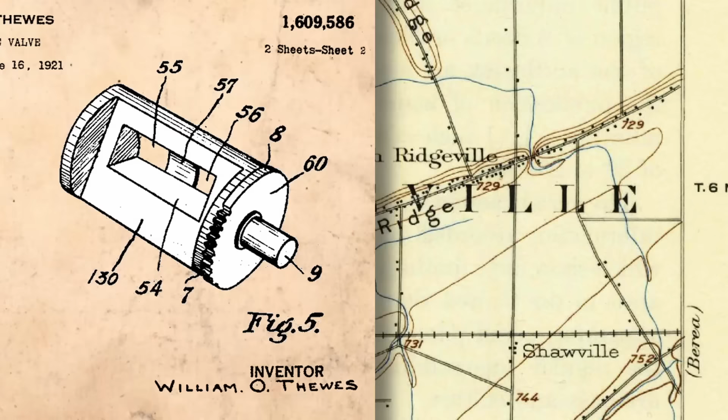The story starts in the town of North Ridgeville, Ohio, with a man named William Thewes. William was born in 1883 in Cleveland and had previously invented a carburetor for the R&S Valve Company in 1921. In 1922, he set out to create an improved pipe wrench design.

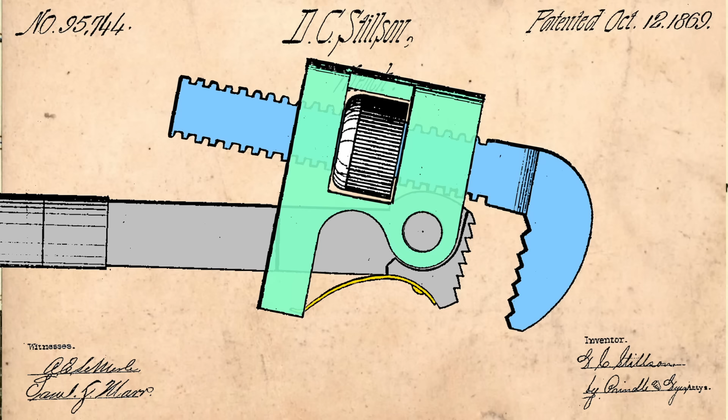At this point in time, the Stillson pattern pipe wrench had become the standard pipe wrench used in America, but Thewes thought he could improve it by reducing the parts count to create an even stronger wrench. Thewes' design did away with the pivoting head mechanism, which had to be machined out of a separate forged piece. He also substituted a cast lower handle, which used a forged replaceable jaw insert.

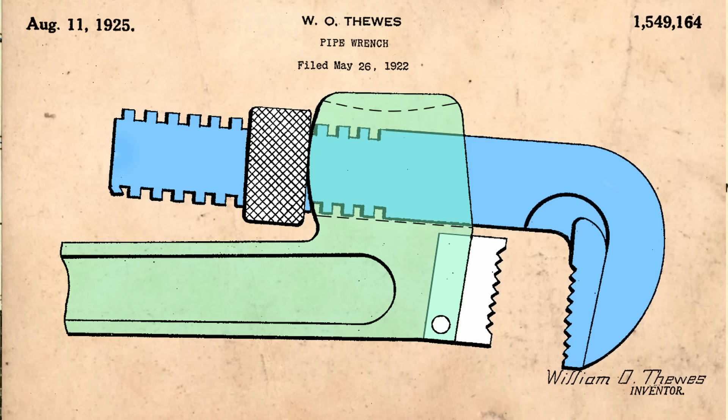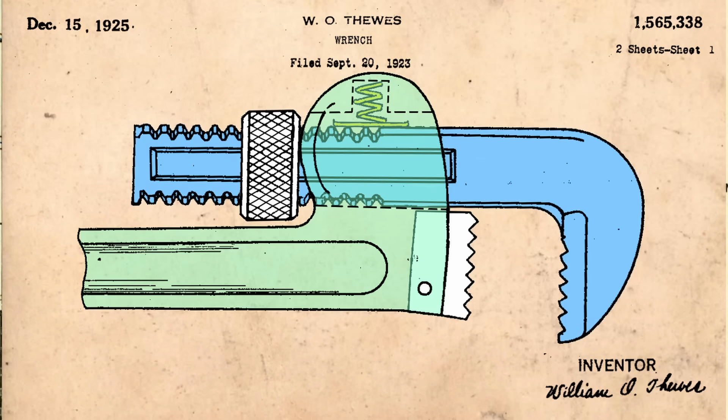The upper jaw and nut are taken direct from the Stillson design, but the upper jaw now pivots in a pocket cast into the lower handle. An internal flat return spring kept tension on the pipe when in use. The wrench design would be refined in 1923 by switching to a coil-style return spring, and the wrench we know today came out in '28 when a little hump was added to the back to hold the nut and keep the jaw from sliding back down.

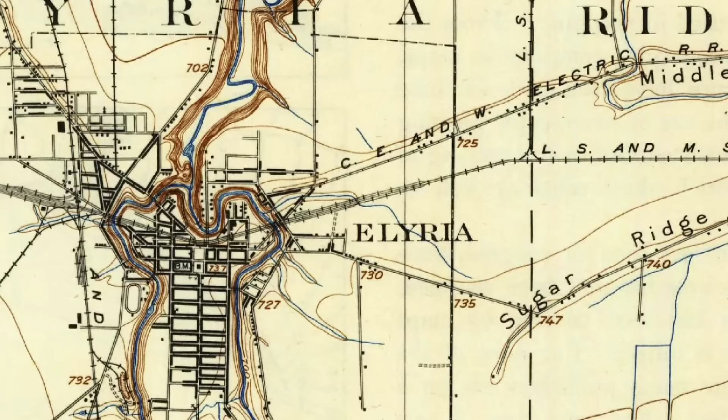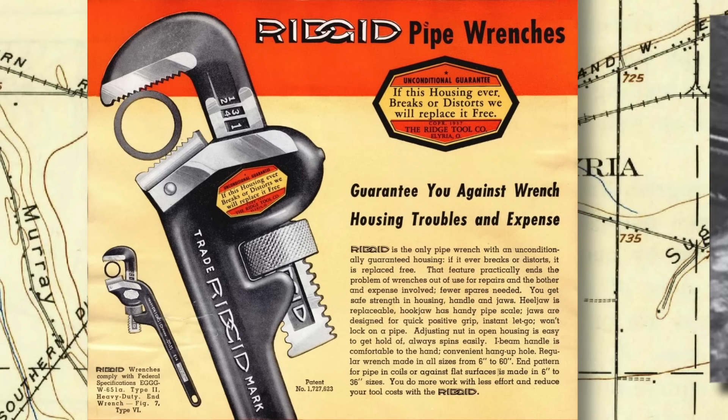To produce his invention, William and his wife Barbara founded the Ridge Tool Company in 1923 along with another man, Carl Ingwer, who would become the company president. Eventually, they moved down the road to the town of Elyria, Ohio, into the former Garford automobile factory. The wrenches would be sold under the RIDGID brand, but convincing consumers to switch to a new style of pipe wrench was not an easy task.

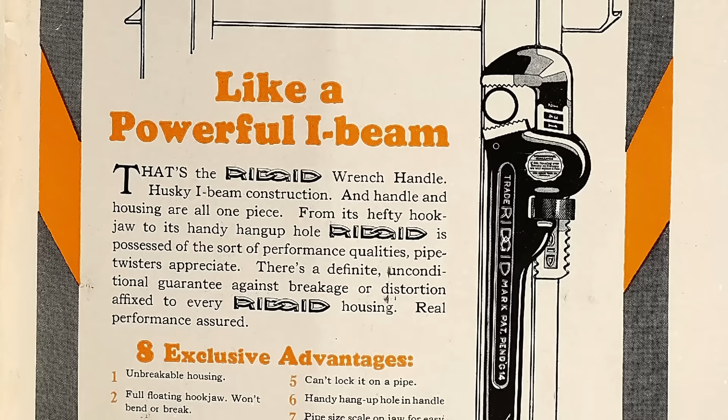To entice consumers, RIDGID branded their wrenches as being more heavy-duty than the Stillson, offering an unconditional guarantee where if the wrench body broke, they would replace it, no questions asked. RIDGID had another marketing breakthrough in 1935 when they released their first calendar. Initially featuring artwork by pinup artists George Petty and Frank Diamario, the calendars depicted women in sometimes unusual poses alongside RIDGID products. These calendars would grace the walls of workshops, hardware stores, and garages all across the country, making many a man rigid over RIDGID tools.

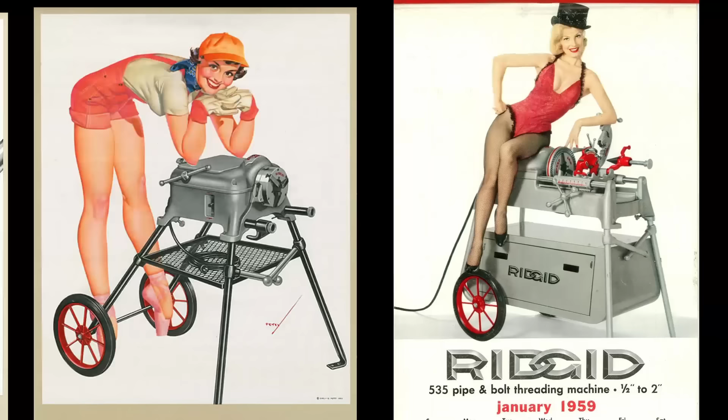The calendars would change going into the 1960s, using stylized photographs of real models instead of drawings. By the 1970s, they had switched entirely to photos of models, many taken by photographer Peter Gowland. These are nice, but it's just not the same as the earlier artwork style. The last calendar produced was for the year 2017, which did not feature any female models at all. The artwork was done by tattoo and comic book artists. While the artwork is cool, it's still just not the same, and they haven't produced a calendar since.

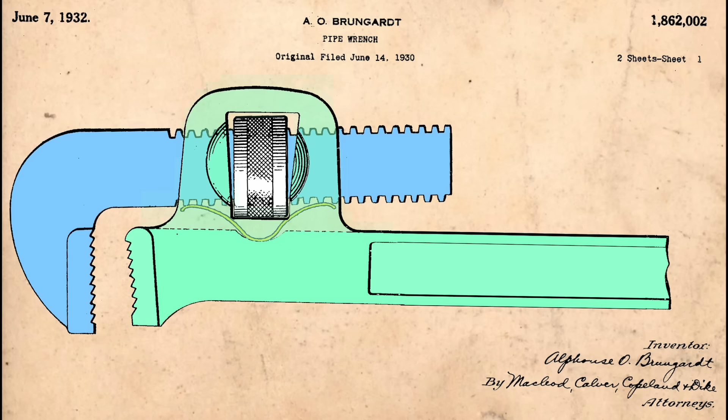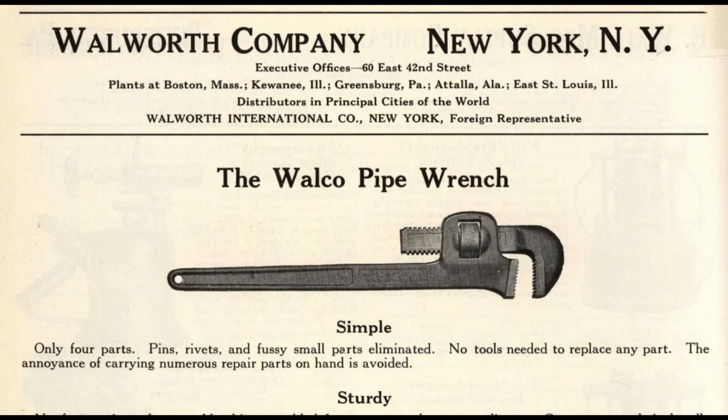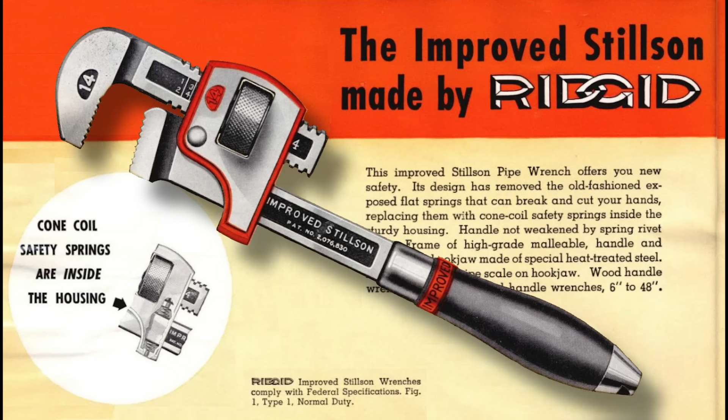Getting back to our original story, William Thewes had set out to dethrone Stillson as America's pipe wrench, and other companies soon followed suit. In 1930, Alphonse Brungardt invented a pipe wrench design that looks awful similar to the RIDGID design. This design would be sold by the Walworth Company, the company that owned the original Stillson patents. Not to be outdone, in 1937, Thewes invented a copy of the Stillson wrench. Dubbed the Improved Stillson, it featured internal return springs compared to the external springs on the original Stillson.

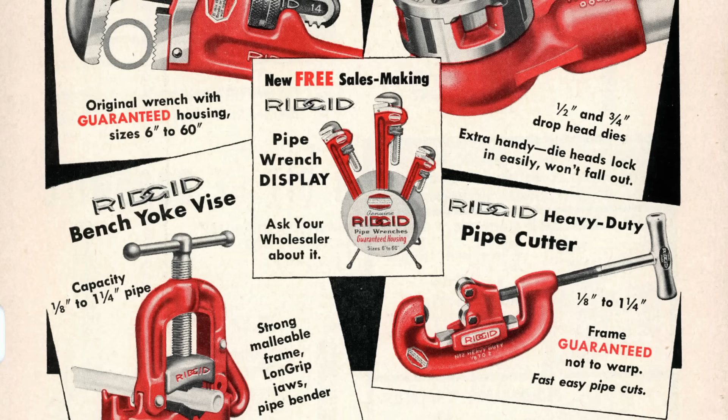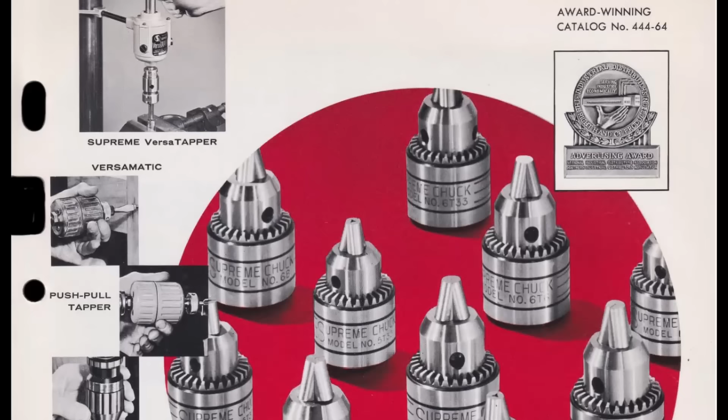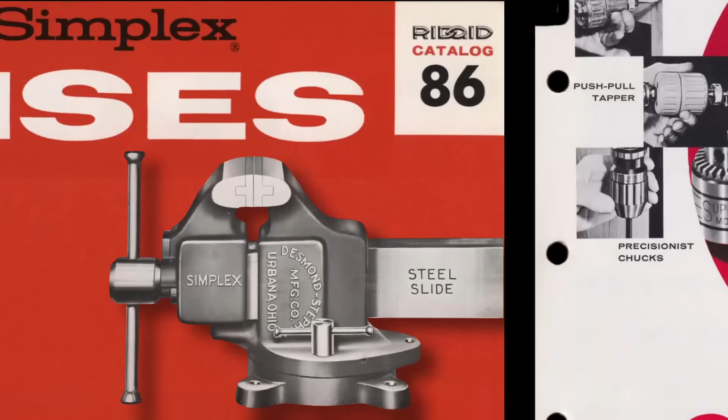RIDGID also made other products for the plumbing industry, including pipe cutters and pipe vises, and they introduced their first electric pipe threader in 1948. They would also dabble in hand tools, including the Ritco brand, which was their economy line. In 1963, RIDGID purchased Supreme Products of Chicago, Illinois, a manufacturer of drill chucks, and in '64 they acquired the vise division of the Desmond Stephan Company, adding Simplex brand vises to their lineup.

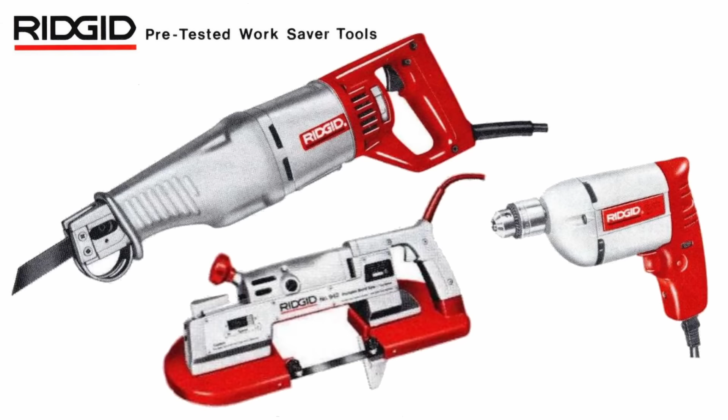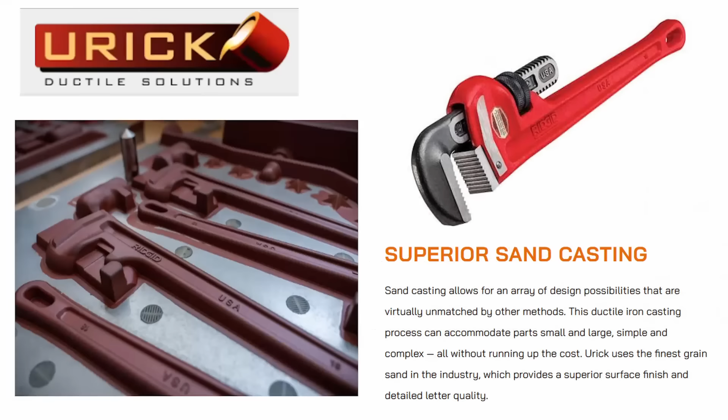In 1966, RIDGID would get bought out by Emerson Electric, one of the largest manufacturers of electric motors in the U.S. This acquisition allowed RIDGID to expand their product line to include power tools. 1969 brought out the first aluminum-handled pipe wrench, which was 40% lighter than an iron wrench and still retained the same unconditional guarantee. And in 1974, RIDGID acquired the Urick Foundry in Erie, Pennsylvania. Things were going great for RIDGID under Emerson rule until 1979.

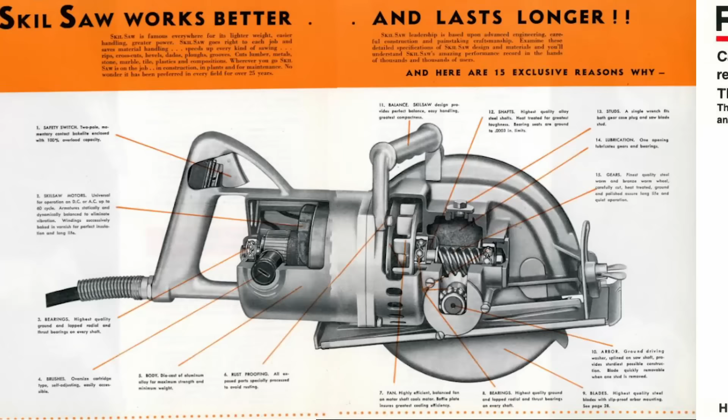This was the year that Emerson sought to buy out Skil, the Skilsaw company. But the Federal Trade Commission got involved, suing Emerson over violations of the Clayton Antitrust Act, basically saying that if Emerson bought Skil, they would be creating a monopoly in the electric power tools market. In February of 1980, the FTC and Emerson reached a settlement where Emerson would be allowed to purchase Skil if they sold off the RIDGID power tool line and agreed to not add any additional power tool lines for a period of 10 years.

So RIDGID was broken up, the pipe wrench and plumbing tool line staying under Emerson, and the electric power tool division being sold to Elyria and Company, a California company that made electric lawn and garden tools for Sears. I don't know, this is another weird case. In all of the other stories in this series, the company gets bought out by a huge conglomerate, and nobody in the federal government cares. But when Emerson buys Skil, they lose their minds. Maybe Emerson forgot to make a donation to the appropriate congressman's campaign or something.

Even though the prohibition on additional power tool lines only lasted 10 years, it wasn't until 1996 that Emerson re-registered the RIDGID trademark for use on power tools, and 1998 when they brought out the RIDGID shop vacuums. It was 2003 when they made a licensing agreement with TTi and Home Depot to sell the RIDGID brand power tools that we know today. This new iteration of RIDGID power tools are made entirely by TTi in China, with the RIDGID brand name being licensed to them. TTi is the same company that makes tools for Milwaukee, Ryobi, and Walmart's Hart brand.

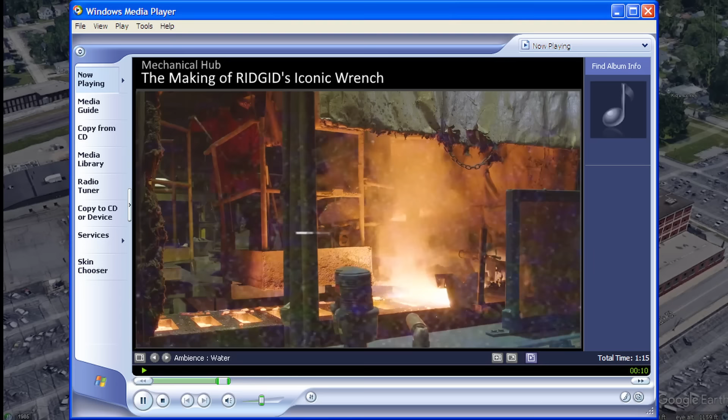And that gets us caught up with the history of RIDGID tools.